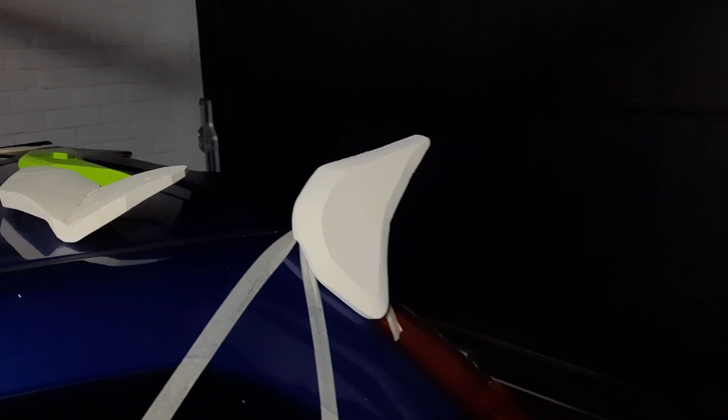Today I'm sharing with you some of the end plate designs for the Fiesta RS style spoiler project and the process I went through to turn them into digital parts.

So here I am, having done the sculpt, feeling very proud of myself. All done by hand using a sander and a block to get the shape that I'm looking for.

Now the next stage of the process is to try and digitise this so I can print out a set for the left and right hand side of the car.

That end plate sits at something like a 25-degree angle relative to the vertical, and I've had to do a cutout on the inside so I can mount it onto the lower spoiler.

So the idea is that you have this mounted on the lower spoiler, it connects to the upper spoiler, and it provides a kind of aerodynamic end cap. So into the computer world we go.

So the first step is to take a photo. Taking full advantage of the ruler in the picture, I can then scale that.

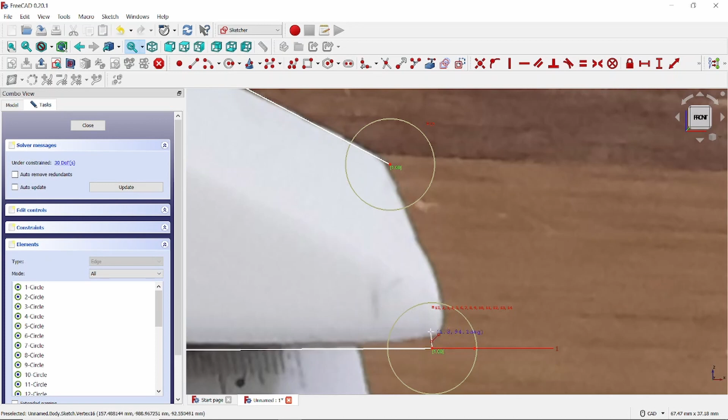So I'm able to then take an outline. You can see I'm using a B-spline tool in FreeCAD to trace around the outside of the part to give me my curves. I'm then able to zoom in and get those points to match exactly to the photo, so I'm getting a pretty good one-to-one replica in 3D of the parts.

Now it's a really cool interface. You don't have to be a CAD wizard to do this. You literally push and pull the points till you get the line where you want it to sit. You can move the parts further away, you can move them closer together, and it basically gives you nice control over that spline running around the outside of the part.

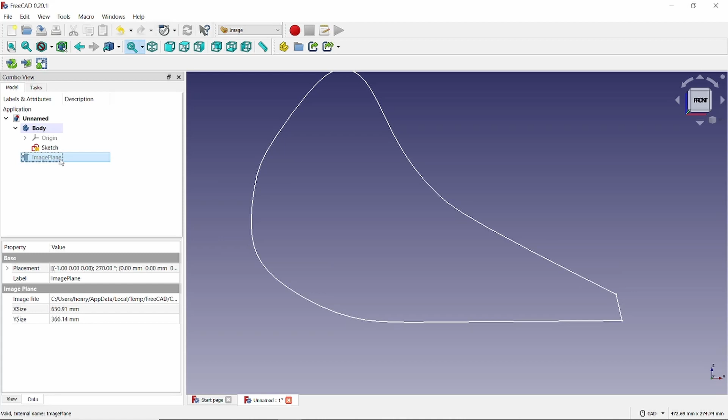So there we go, here's a sketch. You can then pad it up to your heart's content and make it into a 3D representation of the end plate. Obviously there's a lot more detail involved, and I was lofting between different sections, creating Boolean operations to subtract volumes. But here's what I've come up with.

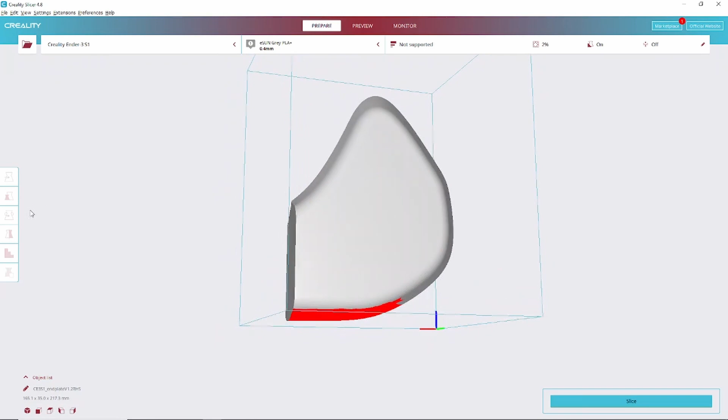Now, the part was actually too big to fit on the Creality Ender 3 print bed, which is about, I think, 220mm wide. So I've split the part into 2 pieces.

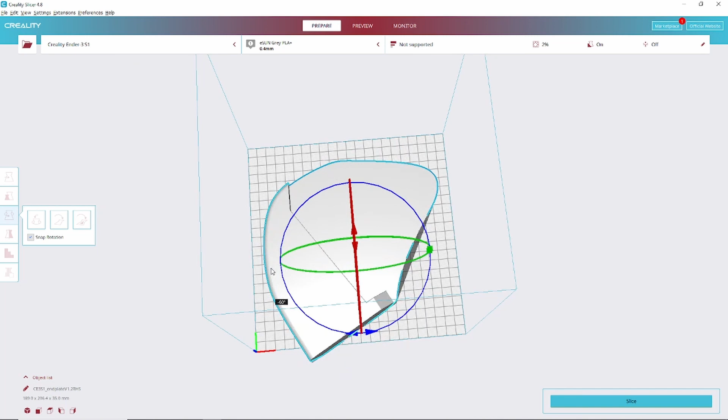Now when you load it into the slicing tool to turn it into G-code, for some reason it's dumped it in vertically, so I've laid that part down flat, and I'm having a look at where the build supports are going to be. If you have a kind of overhang, the print will need support to stop it warping and going funny. So obviously I'm tweaking the angle that the part sits at on the build plate so that it fits on quite comfortably in the middle.

And then let's take a look underneath. You can see that red band - that's the area that I'll have to kind of chip away at for the artificial build supports and sand to make it all lovely and flush.

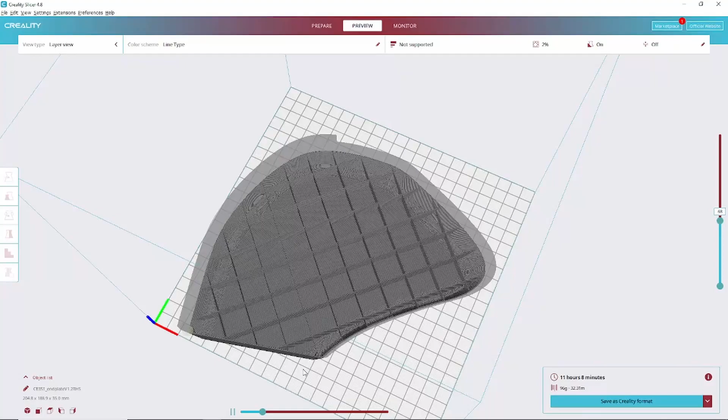I've also reduced the density of the inner supports within the device itself to reduce the print time. So you can see these are probably, I don't know, 15mm wide or so.

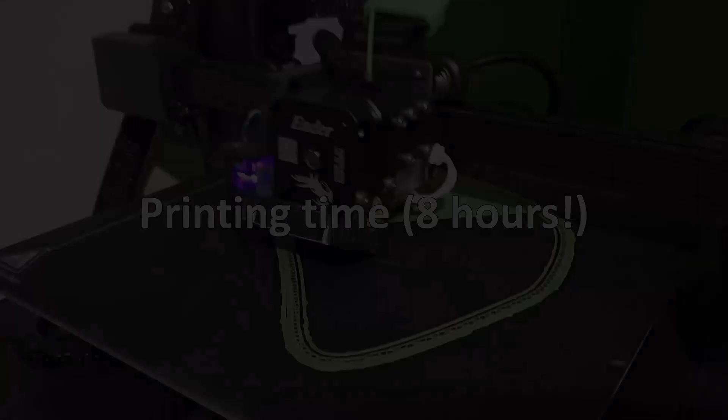And there's the end piece, which you then effectively glue on in the real world, but you print in 2 parts. So it took about 8 hours to print the base part that you see here, so the main kind of outline.

And then I moved on to the trailing edge section, which you can see there. So total print time, I would say, is probably getting on for 12 hours.

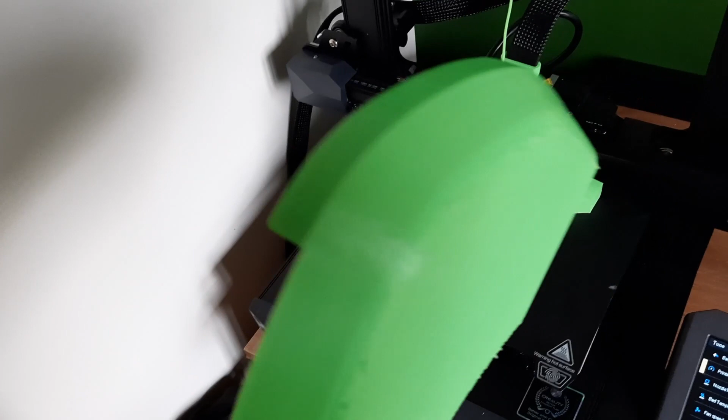I don't claim to be a 3D printing expert, but you can see here I've really reduced the amount of print material needed to make the part, while still getting a quality that I'm pleased with.

So here are the 2 things side by side. Now obviously I've not quite fully replicated every feature because I've got in mind things like build tolerances, which are harder to do with a piece of foam.

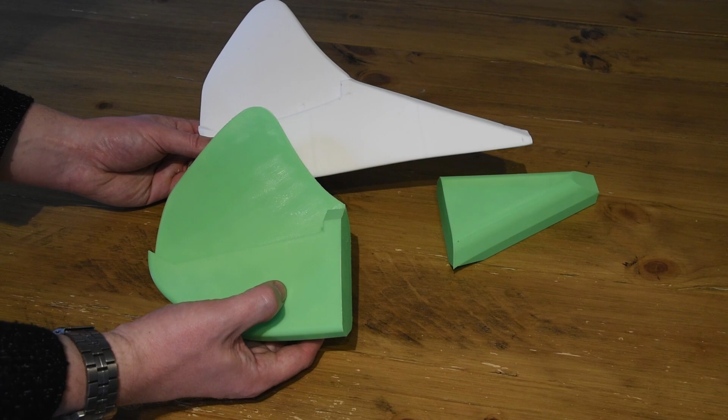But you can see here I've got that nice cutout for where it will sit on the lower spoiler, and that feature's replicated really nicely there. So that will just sit in and give a bit of extra support when the 2 things are bolted together. And then I've got the end piece, which should press.

Now one of the things you've got to consider is how you want to join the 2 parts together. Now I believe super glue is the best choice for a PLA product, or Gorilla Glue also works quite well, being a plastic friendly adhesive.

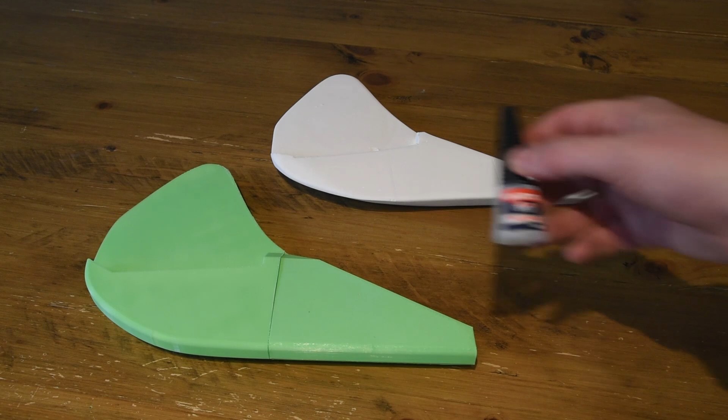So I've got some good old fashioned Loctite super glue. I'm going to smear it in finest zigzag artistic fashion all over the surface, press the 2 parts together, and voila, I should have a nice final part I can use for trial fitting.

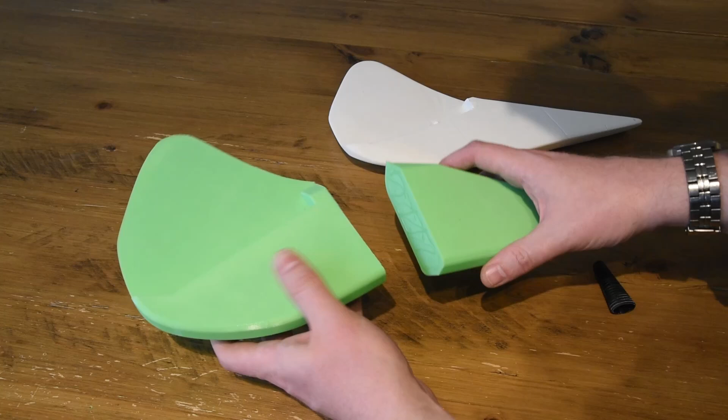So there we go, taking extra care not to get it in my eyes or all over my skin. I can now press the 2 parts together, get them just right so everything's nicely lined up, and you'll never know there were 2 bits.

So there we go. One assembled end plate, entirely 3D printed, but based on a sculpt from the real world.

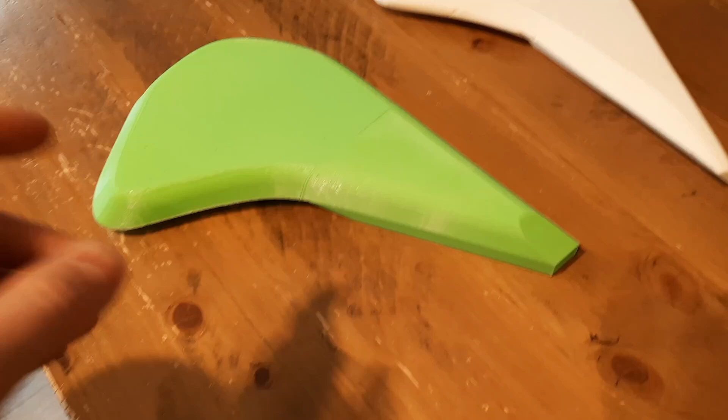So I'm loving this hybrid working. It hasn't cost me a penny for the CAD software, so I really recommend FreeCAD for these kind of projects. It's powerful enough. Yes, it's not as good as CATIA or SolidWorks, but considering it's free, it's pretty darn impressive.

So there we go, really pleased with those 2 interfaces, nicely captured. Now, it wouldn't be a Hengineer video without a montage and getting on with doing some assembly.

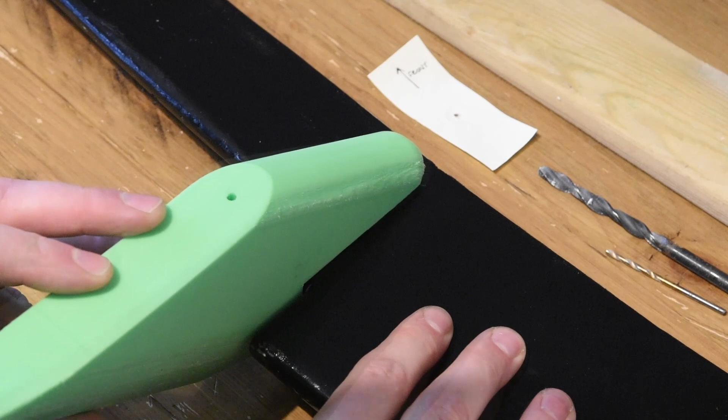So the next step is to drill out some interfaces for the strakes that I'd previously 3D printed into the lower spoiler. I can then do a trial fit with the upper spoiler and then put the end plate on and check the fit of everything together.

So I'm using a hole template to make sure I get the centre of the strake hole interface about right. And then I'm going to be using a drill to first pilot it and then open it up to full size to take an M6 bolt.

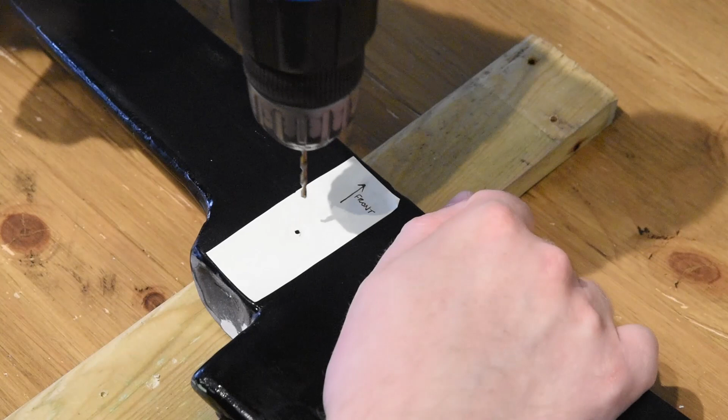So protecting the kitchen work table, chucking down a scrap of wood and punching through there with a standard sort of 2.5mm pilot size drill bit. Just got to take care on the opposite side.

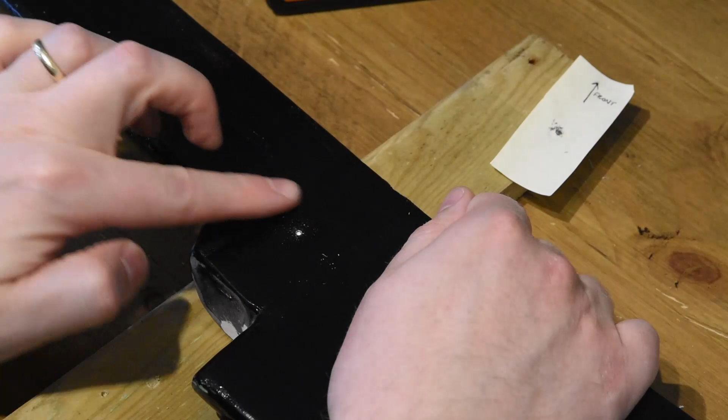When drilling through composite, you can get backface splitting, where effectively you have that jump in force and it rips all the fibres out as you punch through the back of the part. So clamping it down firmly, providing a bit of positive pressure and a nice controlled feed is what you need to prevent that from happening.

But that's okay, because it's not the final interface. As you'll see in the next video, there'll be some 3D printed parts being added onto the lower side of the spoiler next.

So thinking about assembly time, I'm going to punch through that M6 bolt, Allen head. At some point I'll need to rebate it in so it's completely flush on the lower face. But effectively you then use an Allen driver or an Allen key to screw that all together.

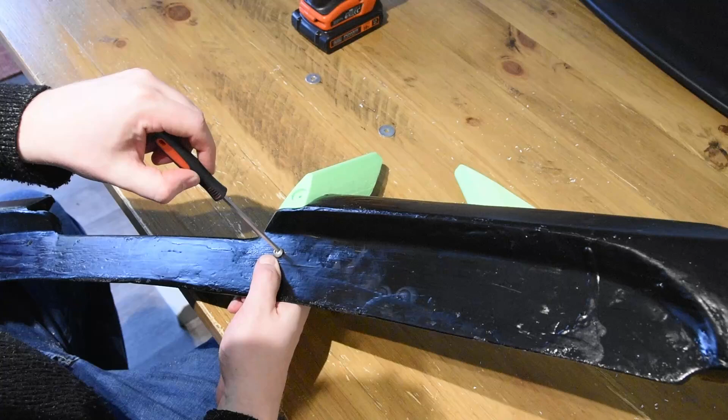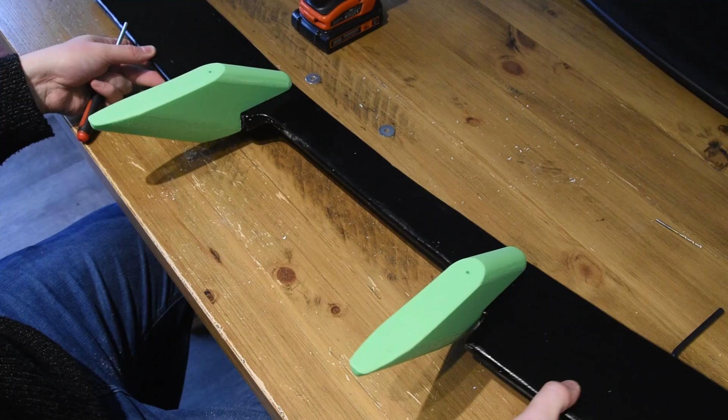With those woodworking fasteners built into the strake, you then have a nice hidden interface that you won't see from the outside. But it's still sort of flexible and wiggleable enough to allow you to line everything up before finally tightening all the parts. Exactly the same process on the other side, and there you have it, a lower spoiler with two rather fetching vertical strakes ready to support the upper spoiler.

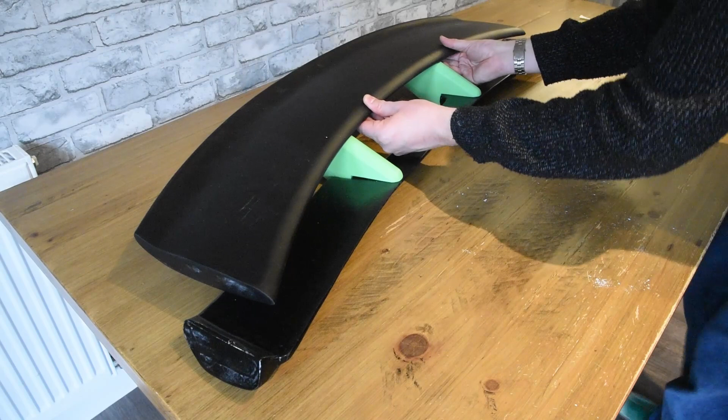So here it comes, held by yours truly in a kind of precarious balanced fashion, but it gives an idea for how the part will look when it's finished.

So there we go, supported by a finest roll of kitchen towel on the kitchen table. That's the foam part that I made for the end piece, and here's the 3D printed one. Nice and chunky, in keeping with that RS style look, and obviously fully removable and potentially paintable and sandable and treatable into any shape you might want.

So there we go. I'm really pleased with how this is actually coming together as an assembly now. The 3D printer is really taking some of the effort out. So there we go. Really pleased then with that interface.

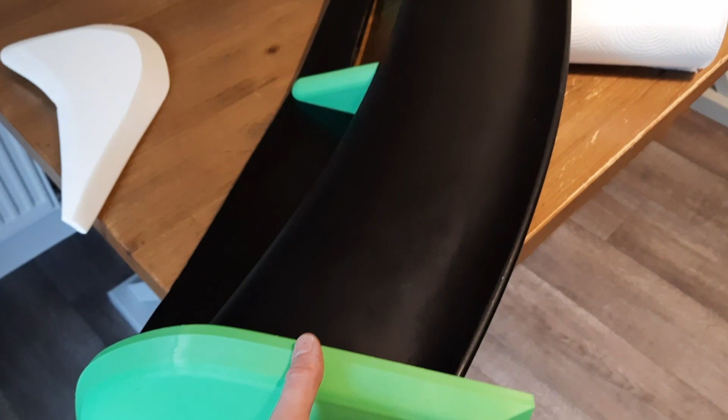I'm going to spend a bit more time now getting the bolting sorted on the lower and upper spoiler into those end plates, coming up in the next video. You can see a nice low profile gap from behind. Obviously I'm going to be working the strakes and the other designs up.